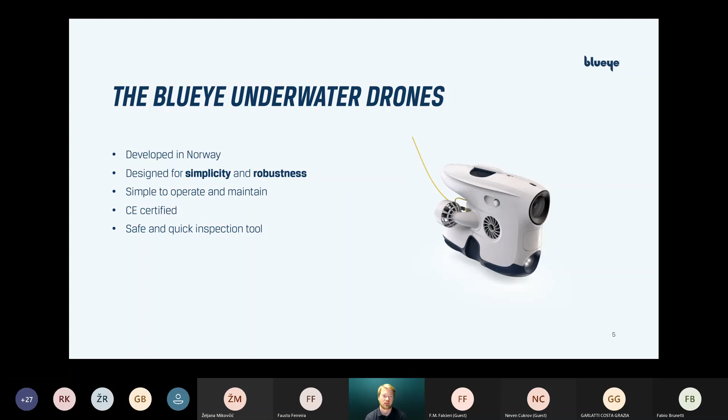And it's also safer in terms of operation versus divers, and you can do more jobs without stopping the main engine, or it's easier to get access below. So the challenge we solve is low friction access to view what's below the surface.

Our target customers are professionals that benefit from frequent underwater inspections. As I said, it shouldn't be necessary to be a dedicated ROV pilot to use this drone. With minimal training, anyone in your company can pick it up and very quickly start using the Blueye Pioneer as a tool.

Today our main markets are the marine industry, aquaculture, ports and marinas, and offshore and hydropower are becoming more and more important markets for us.

To give you some examples, applications in shipping are typically propeller and hull inspection, assessment after hull cleaning, and biofouling checks, making sure the cleaning was done properly. It's usually done by a third party, and you want to verify that they actually did the job.

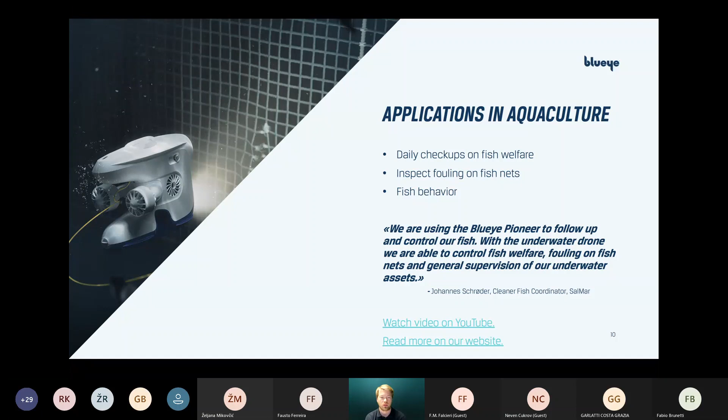In hydropower, it's used for regular inspections of underwater assets, preventive maintenance, emergency inspections, and condition monitoring over time. You can see if the dam is intact, if the sealings between the concrete parts are intact or starting to harden and potentially leak, if the gates are functioning properly, or if they're filled with debris - foreign objects in the intake.

They also use it a lot for tunnel inspection, which is very risky for divers to go into. The alternative is to empty the tunnels of water and have men walk in after it's secured, making sure the tunnel doesn't collapse from the reduced pressure. So when you can just stop the water flow and put the drone in, it's a much safer way to inspect these tunnels.

We also have some blog articles on our webpage about SFE here in Norway, who did construction of a new tunnel where they actually filmed the last explosion to make the tunnel - connecting the wet part into the dry part of the tunnel. So that's exciting.

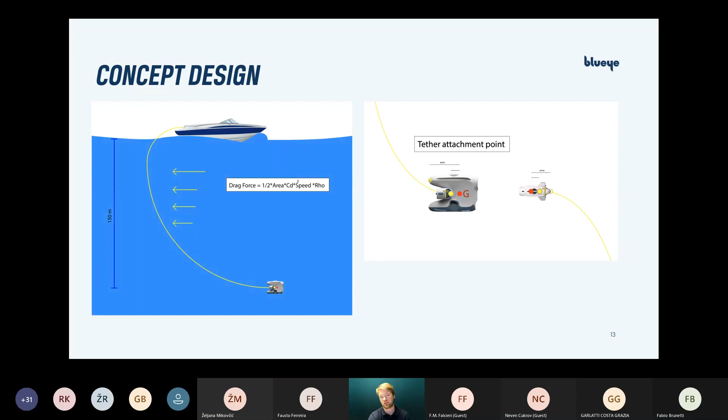This also means that since the thrusters come behind the attachment point of the tether, it's possible for the drone to turn even though you have strong forces pulling you backwards with the tether. The drone is still fully capable of turning. This is important, for instance, if you go downstream a river and then all of a sudden want to turn around. If you do that too late, it could be difficult to compensate for this moment.

The next important feature of our design is that we chose to have a standing design. This means it's light on top and heavy at the bottom. The buoyancy is basically behind the camera, and the battery and weight are in the lower canister. This makes it very statically stable, so no matter how you toss it in the water, it will always rise back up. It's tuned so it's not a super stiff design either, but it nicely converts back to a neutral position upwards.

This also ensures that the drone is always standing up and down, no matter if the sea floor is a hill or going downwards or upwards. Whatever 3D landscape you have, it's always easy to navigate because you know your camera is pointing forward and everything is level, making it easier to grasp the space feeling.

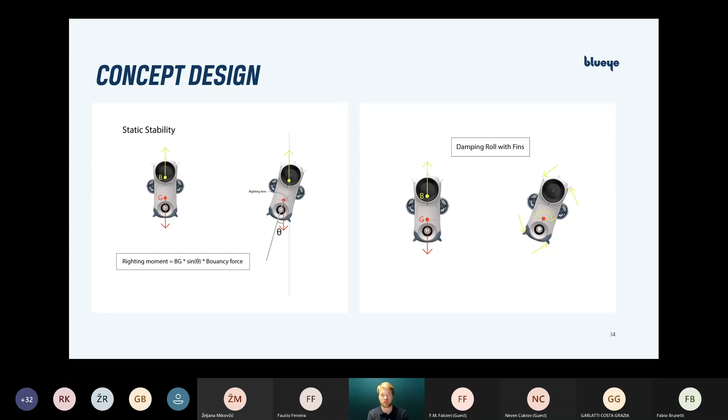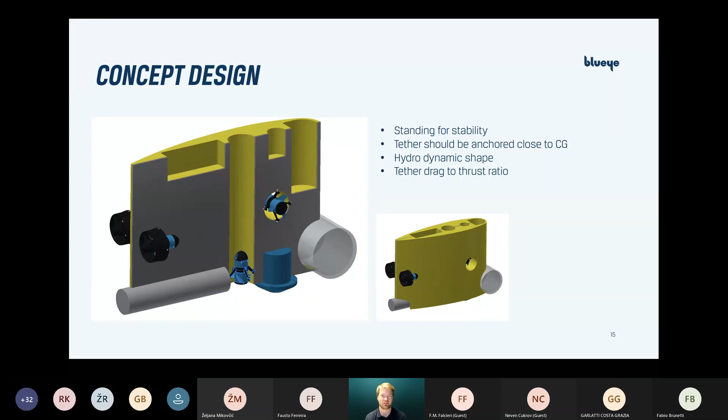So then the next one we wanted to make a bit nicer. Of course, it had to be looking appealing because we wanted to make sure that this doesn't look dangerous to use, or that it's super advanced only for drone experts or the most eager tech guys. So we wanted to make it look smooth and easy to use from day one, even though everything inside was super hacked. It looked quite finished on the outside.

And as you see, when you open it, you have all this buoyancy inside, and we had separate canisters with the cables in between. It was all off-the-shelf components, just stacked together, cramped in this canister, trying to make everything waterproof so we could start getting a hunch of how it actually feels to drive this thing. It's such a new experience for most people, so it was both making the new product and making it waterproof at, I don't know, 1/10 or 1/100th of the price.

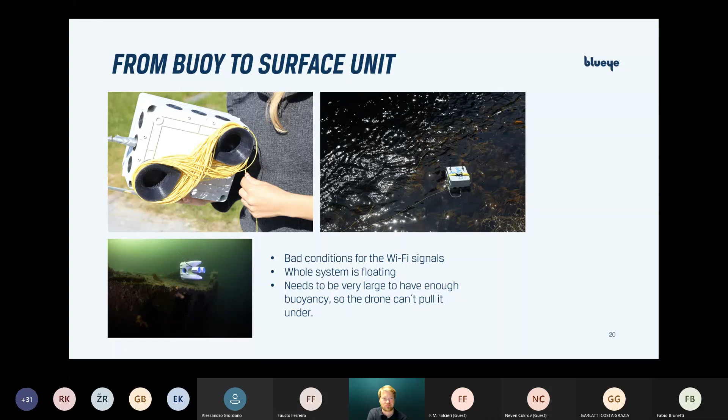Another thing that was really special about this design is that the whole lid is actually waterproof. It's a massive piece of plastic that's machined out, and it has to be really thick so it didn't deflect or get a new shape under 50 to 100 meters of pressure water.

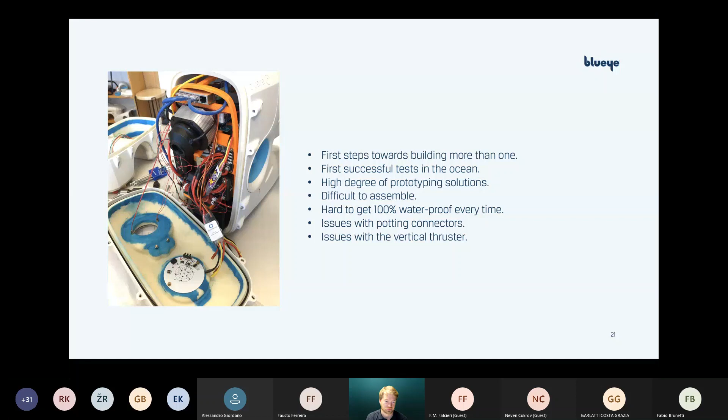That's why we did some iterations on the vertical tube as well, splitting it and moving the inlet up on the side, so you don't get that suction effect sucking up the sand and fine particles. But that you'll see in the later iterations.

This is also the first model that we started to make more than one of. So we built 10 drones, trying to get a mass production feel of it, and we had this inner frame so they could all be assembled the same way.

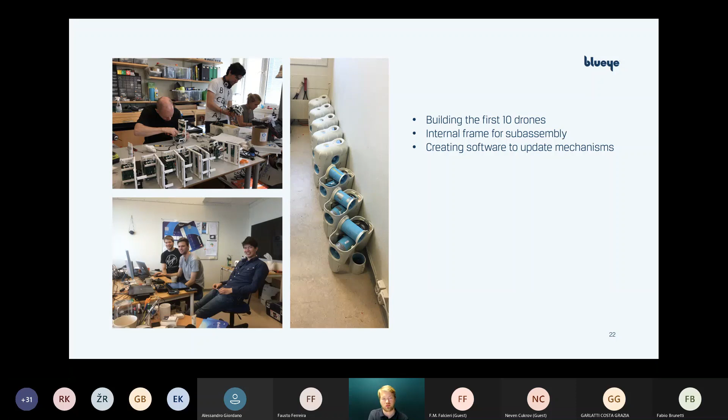It's more about creating software that could be distributed easily to more than one drone. That's also quickly important as you get more vehicles. Here you see the first 10 drones assembled, also taking some pictures - that's the early team.

The P1 was the first drone that we actually got into the ocean to get some hours on. Did it work diving alongside another diver? What kind of interaction do you get with a camera together with the topside radio, etc.? So we started using it, and that was a really fun period.

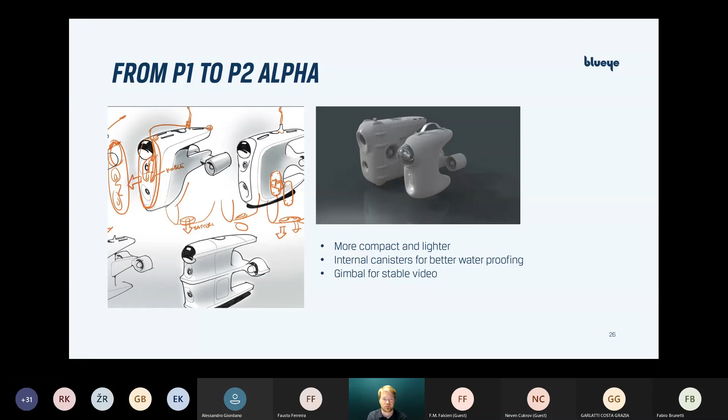Then we continued to the P2 Alpha. We had to make it even smaller, and we wanted to add a gimbal to make the images even more stable, while it should still look appealing. So we started testing this P2 Alpha - it was super small, but we had to make sure it behaved properly going up and down.

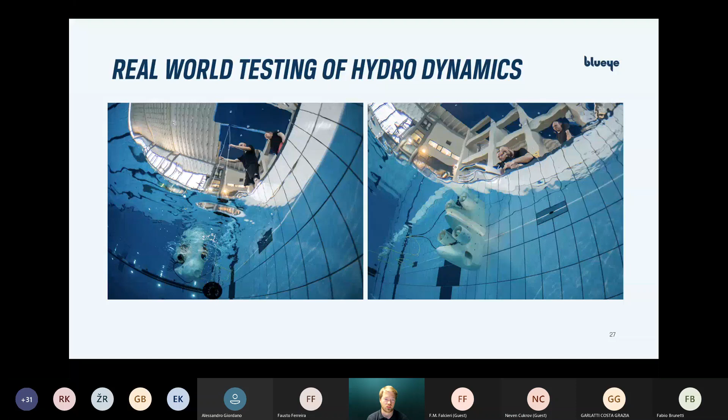So this is where we added the fins and did all the research in terms of measuring roll, pitch, and yaw with the different fins, placements, and areas.

So now you see that's the model in 2017, the P2 Alpha, and the next one is the P2 Beta. That's where we wanted to reduce costs even more, so we had to remove the lateral, or sway, thruster. But we quickly saw that it's a really nice feature to be able to go sideways, so it was back again in Beta 5, the 2018 version.

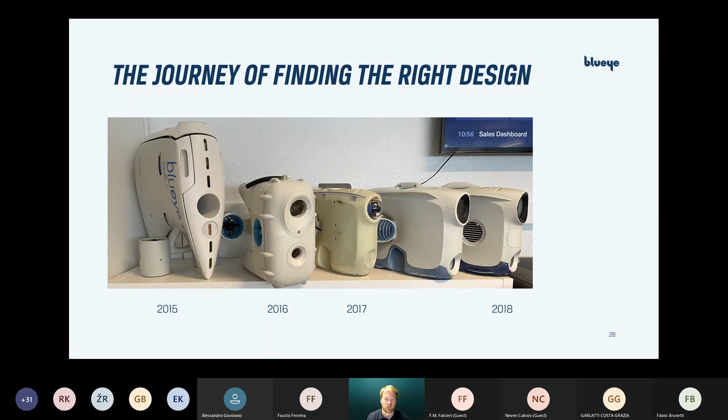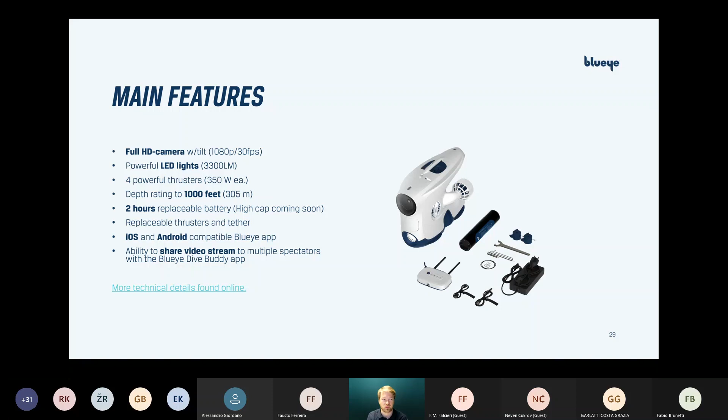So this is what we ended up with, the Blueye Pioneer. I'm not going to go into all the details - it's easy to find online - but I talked about some key features, like the distance between the camera and the light being important for backscatter. We have the thin tether.

We have the self-stabilizing design with automatic heading based on the 2 IMUs with the 9 DOF compass, gyro, and acceleration. The inlets on the side are lifted up to have fewer particles getting sucked in, and it also allows the battery to go all the way through the main body, which was also a good benefit.

It's lightweight - you can carry it on an airplane. It's really fast going forward because of the hydrodynamic shape, has a great depth rating of 305 meters, and the tiltable camera came in with the Pro.

So we have the mass production at Flex - we did this scale up. In 2019 we produced about 1,000 units in Poland, and this really required good test stations and a solid system, finding all the small bugs before we shipped it out, because we really had to make sure it worked every time - we couldn't afford to get all these drones back.

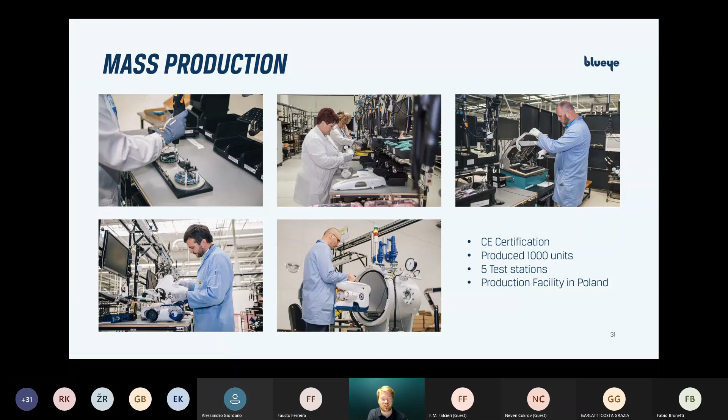Then we did the Blueye Pro. We added the tilt on the camera based on customer feedback. It was really a great need to be able to look upwards underneath the ship hulls.

We added the automatic pitch stabilization. So based on the IMU, we tilt the camera so it smooths the image. We increased the depth rating. By adding the dome, we could have more pressure on the glass. And we also had to change the buoyancy in the back.

So small upgrades, but really, really important features from the market. So how do we choose what are the next features to produce? We go to our customers and ask them, what do they love with our product? What happens if we take the product away from them? What jobs can the drone do for them, and what would we have to change in order for you to be able to do more jobs with our drones?

So the typical answers we have gotten lately is to improve the waterproofing of the surface unit, because it's splash proof, but it's not waterproof, and there were some weak points in terms of the antennas. So we have moved them to the inside, internal antennas, and made it waterproof.

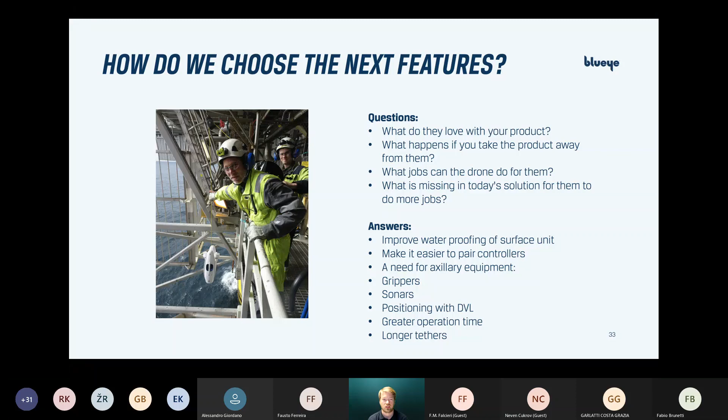And then it's also being able to add more stuff, grippers, sonars, positioning systems, DVL, and also greater operation time. So we're now working on the next battery with more than twice the capacity within the same size, so it will fit all the previous drones as well, and longer tethers for greater reach.

Coming soon is our next generation ROV. So if you want to learn more about our next model, you can join our online launch event on June 1st, and here we will show you what's new with the next Blueye drone.

Basically, as you can see by the pictures, it's the guest port, which allows for more equipment to be added, extra lights, camera, grippers, whatever you need. We have up to 8 protocols on these 3 guest ports, so it's very flexible in terms of adding all types of sensors and most of the underwater equipment that is out there.

So just sign up for this online event and you will get a really nice introduction, and actually also the first time we will share the launch video, so that's exciting. You can just Google it, you'll find it on our webpage, that's probably the easiest.

And then I also just wanted to throw in the Blueye SDK, which I think is really relevant for science and research, and probably many of you are into this field. So what's special about the Blueye is that we also have this Blueye SDK. It basically means that you can write your own software talking to the drone.